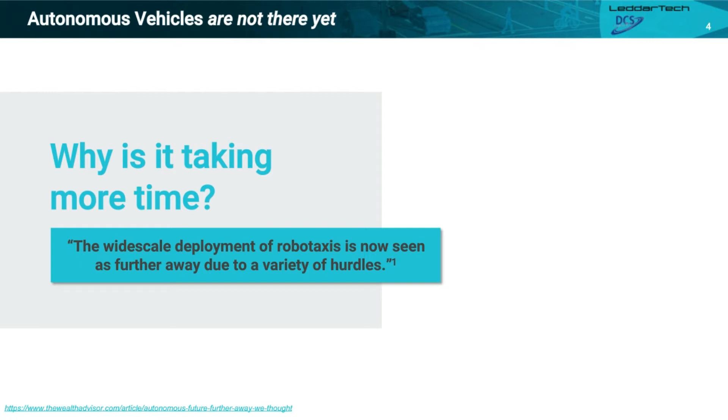So why is it taking more time? There are many reasons for that, a variety of hurdles. So first of all, just the development time that it's taking. It's a lot more complex than people thought at the beginning, I think. Also, the technology readiness, the components readiness, the cost also of the components. It's going down a bit with the years, but it's still really expensive to develop those types of technologies. It's a really complex system.

Also, I think the market adoption, people might not be completely ready to have these types of vehicles on the road. And finally, and I think it's the big one, it's the regulatory and legal aspect of it. It's taking a lot of time for laws and regulation to develop and to be able to enforce them. And this is also one of the reasons, I think, why completely autonomous vehicles at least are taking longer than we thought.

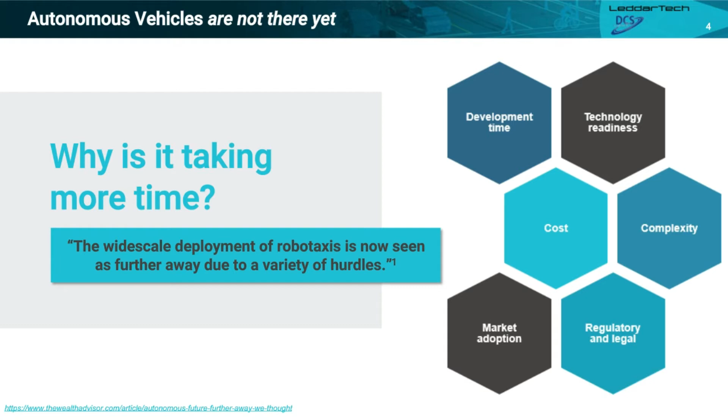There's many challenges and opportunities ahead of us, and I think if we focus on the short term, we need to focus on ADAS systems. So if autonomous vehicles are taking longer and are not there yet, we need to focus on what's coming in the next few years. And the ADAS system market is huge.

The market is evaluated to be $81 billion by 2025. This is including all different companies that are included in this: OEMs, tier ones, the components suppliers and stuff like that. So it's really a big market.

We need to focus on the short term and how can we improve those ADAS systems. So there's a lot to do in terms of efficiency, the convenience also of the system, and how can we make those systems more safe. Because I think this is the main goal also of ADAS and autonomous vehicles, is to make the roads safer.

This leads me to talk about the weaknesses that we have in today's ADAS systems. So if it's such a big market, and it will still be a big market in the next 5-10 years, I think there's some weaknesses that we need to look at and that we can maybe improve. So the technologies that we are using at the moment have some drawbacks, of course. This will always be the case.

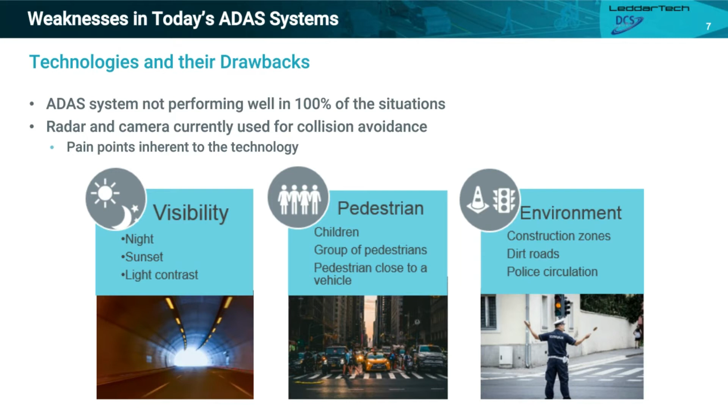Here, I think this is an interesting statistic. It's saying that 75% of pedestrian fatalities occur in the dark as compared to daylight, dusk, and dawn. So when I'm saying that cameras or sensing technologies have some difficulties working at night, this becomes a big issue considering that almost all of the fatalities with pedestrian collisions happen during the dark.

So this is, I think, a big point that makes it clear that we need to improve the ADAS system at the moment and make sure that it can work properly in the dark, because just this, I think, is a really important point, and it would be a great way to improve safety on the road.

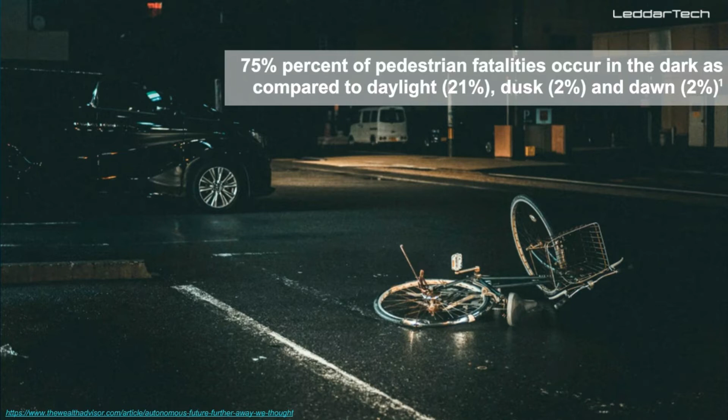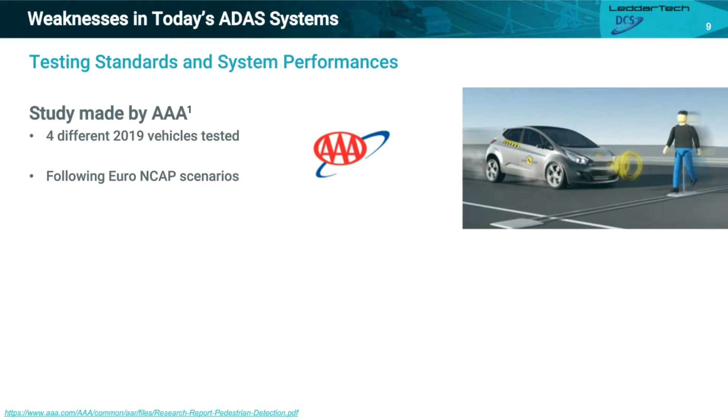Here is a study that was made by the AAA, the American Automobile Association. They used 4 different 2019 vehicles. They tested these vehicles with different scenarios, always following the Euro NCAP scenarios. And the result that they got, honestly, I thought the ADAS systems in 2019 vehicles were better than that.

So here, the result that they got is at 20 miles per hour, a collision with an adult pedestrian was avoided 40% of the time. I think that this is a result that might be okay for helping in collision avoidance and stuff like that, but it's still not a perfect score.

And then when you use a child pedestrian target, this number of collision avoidance was reduced to 11%. So it means that basically when you have a child crossing the street, almost all of the newest systems on the vehicles will not be able to detect it.

Now when you move the speed a bit higher, now we're at 30 miles per hour, which is still not that high because it's only like 50 kilometers per hour. 3 out of 4 vehicles tested failed to reduce the impact speed by at least 5 miles per hour. So basically almost all of the models that were tested hit the pedestrian at full speed.

And finally, the evaluated pedestrian detection systems were completely ineffective during nighttime conditions. So this is another thing that I was saying earlier. Cameras have some issues during the night, and it's clearly shown here in the study that was made.

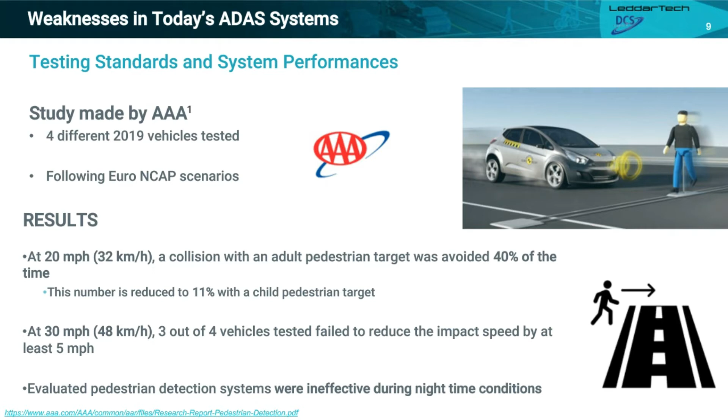So now I talked about the weaknesses that we have in ADAS systems at the moment, but what can be improved? I'm thinking mainly about 3 different points. The first one is technology, of course. We need to improve the technology or use different technologies. The second one is the regulations and standards that can also be improved. And finally, the test scenarios, a bit like the ones I was referring to by Euro NCAP. So these are the 3 topics I think that we can improve.

Technology, I'm going to dive a bit deeper into later. So now for regulations and standards. Creating a regulation takes a lot of time. It's a really long process to be able to enforce and create a law. It takes about 10 years or even more, and this is specifically in the automotive world.

So I think that we need some improvement in terms of regulation and standards to make sure that it's more clear and that every company or every OEM is following the same type of rules, but it's taking more time. So of course, I think it will come and it's in the process, but we just need to be a bit more patient.

There are already some regulations that are coming in the ADAS world. The first one, I think, is a really interesting one. It's the European regulation for a mandatory blind spot information system on trucks. This is starting 2022. So basically, every new truck model will need to have a blind spot information system starting 2022 in Europe. This is really a big deal because it's one of the first laws or regulations that mandates new trucks to have this type of blind spot information system.

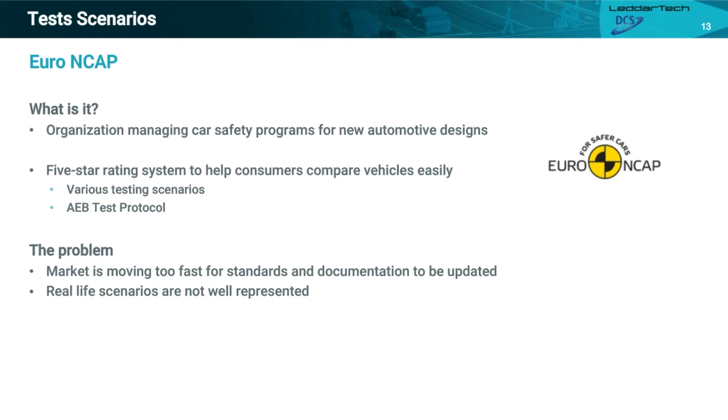And I think the problem is that maybe the market is moving just too fast. So it's hard to update standards and documentation every year. And I know Euro NCAP is trying to do it, but the market is moving really fast, and you cannot update standards or protocols every 6 months. So this is why maybe it's falling a bit behind. And also, I think that real-life scenarios might not be well represented in the Euro NCAP scenario. And I think these are the 3 main points why.

It's usually low-speed scenarios. So you saw earlier with the study that I showed, the tests were made at 20 miles per hour and 30 miles per hour. So these are not really high speed or real life speed where you could hit a pedestrian. Sometimes it's at a higher speed. Also, it's usually done in good visibility. So usually during the day, there are some Euro NCAP scenarios that will be done during the night, but then you make sure that every 10 meters or something, you have a lamp pole and a really good visibility, even if it's during the night. And also, usually it's simple scenarios, so a vehicle that's coming straight and then a pedestrian crossing right in front of it. So it doesn't consider what happens in real life, and sometimes it's a lot more complex than that.

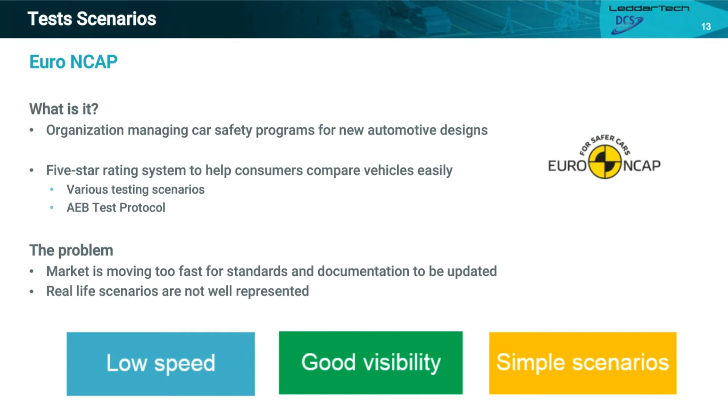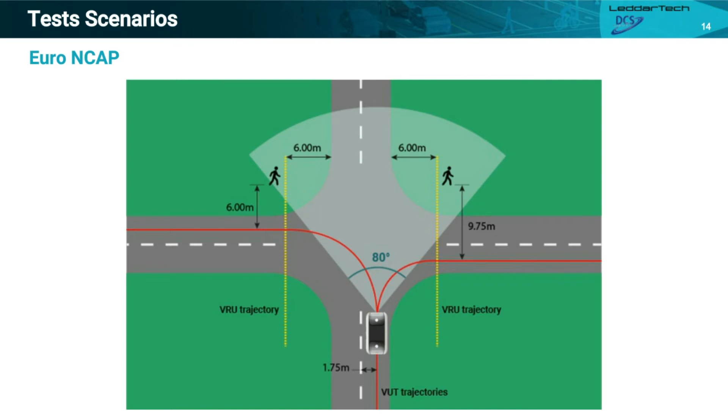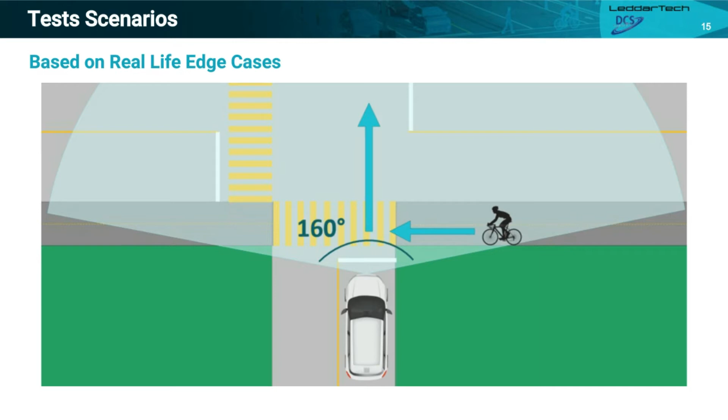And now, just previously I was talking about the technology that needs to improve. So I talked a lot about radar and camera. These technologies are at the moment in vehicles, but there's also new technologies that are coming, and you probably see where I'm getting into here. So LiDAR, of course, they're evolving a lot. It's technology that's entering really the automotive market.

It's been here for a number of years now on test vehicles and different type of vehicles that did some tests, maybe for 10 years now, but in the last few years, there was a lot of optimization in terms of size, cost, and performances. So now the LiDAR technology is more ready than ever to be implemented into the automotive market.

And when we think about LiDAR, it should not be seen as a competitor of this technology. I think it's really a complementary offer to the market. So it's really a new approach of sensing, new technology. It's different from a camera or a radar, and I think it can really complement these two technologies well to make sure that you have higher performances on your ADAS system and that you have higher level of safety for pedestrian and vehicle detection.

And LiDARs can be really used in different mobility markets. So we usually see LiDARs in autonomous shuttles. We also see it in passenger cars and robotaxi. But it can also be used in trucks, commercial vehicles. Also, industrial vehicles could be really useful for LiDAR. So I think there's lots of mobility markets where LiDAR has value, and not only in fully autonomous vehicles, but also in ADAS systems.

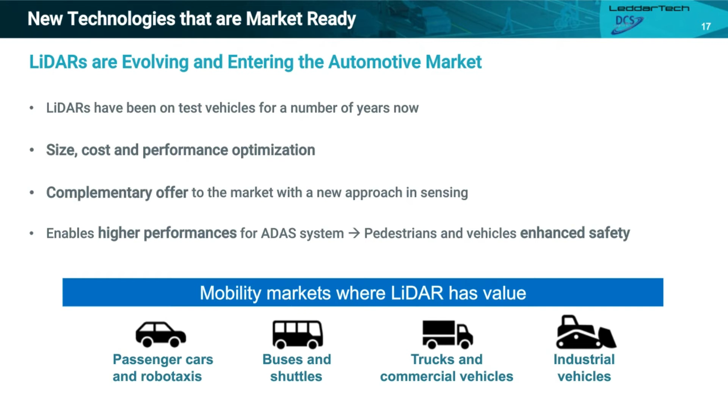And finally, it has night visibility. I think this is a major important aspect of LiDAR: if you're during the night, camera will not work so good, and radar will have some difficulty, for example, detecting a pedestrian, but then LiDAR will be here to complement these pain points from radar and camera. So this is really what I wanted to explain, that they can really complement each other to make sure that you have a safer system and that your ADAS system is having better performances than what we have at the moment.

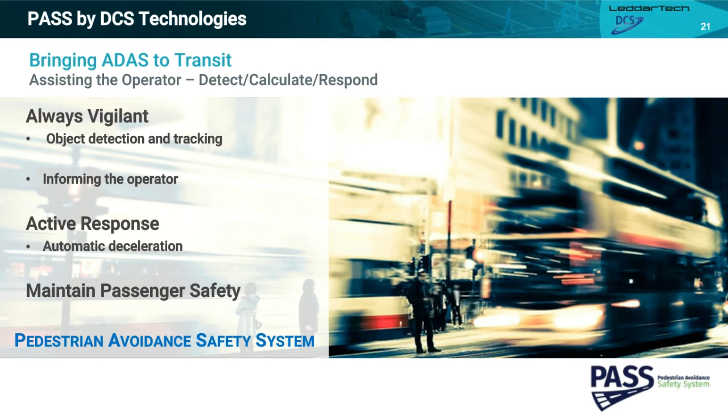Today I'll be stepping through the following topics. ADAS for transit bus is similar to passenger car but different. Choosing the best sensor technology for PASS. A detailed overview of how the DCS PASS technology assists the transit bus operator, and how DCS is utilizing PASS in a transit bus application to enable ADAS test and safety standard development for the transit industry.

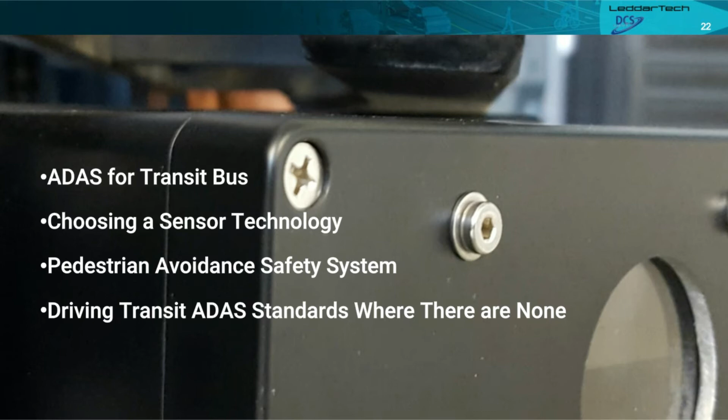ADAS for transit bus, pedestrian avoidance and passenger safety. Transit bus versus passenger cars, similar safety goals, but we have very different operating environments. Whether we are talking about passenger car or transit applications, we safety design engineers all have the same goal: minimize harm to the vulnerable road users and passengers alike.

I'm sure that many of you in the audience have seen or own a personal vehicle with an array of safety features, which pedestrian detection and automatic braking may be one of them. At DCS, we recognize that the same safety technology should be available to the transit industry, particularly urban transit buses where bus to vulnerable road user interaction is very high. So let's face it, buses attract pedestrians.

The U.S. Federal Transit Administration reported that in 2017, the transit bus industry suffered over 4,000 collisions, resulting in more than 16,000 injuries and nearly 100 fatalities. That's the driving force that motivated our engineers at DCS to bring vulnerable road user collision avoidance technology to the transit bus industry with PASS.

Transit bus and passenger cars' primary safety goal is the same: to mitigate collisions with vulnerable road users. However, the operating environments of the two are very different. Passenger car safety systems are designed assuming restrained passengers, allowing for full force emergency braking at the last possible instant. Passenger car collision avoidance systems are certainly marketed and sold demonstrating that fact.

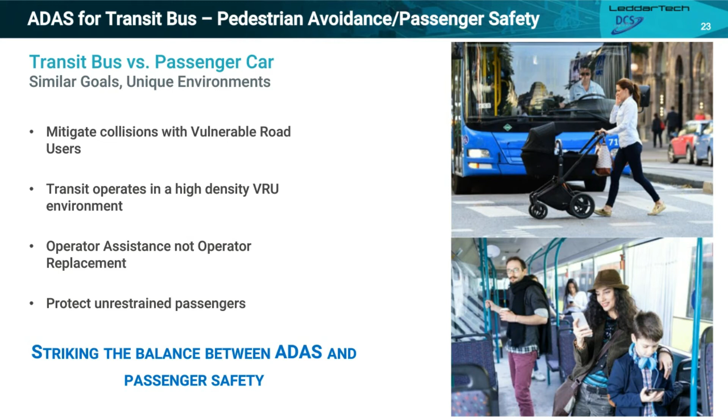Choosing the proper sensor technology for the application. DCS engineers evaluated many object detection sensor technologies as the basis for our detection during the design of PASS. Robust object detection and tracking algorithms require highly accurate distance measurements. In addition to accuracy, the sensor technology needed the measurement range to cover the transit bus operating speeds and scenarios. LeddarTech LiDAR products delivered on both accounts.

We needed the flexibility of the sensing technology to address operational specific vulnerabilities such as A-pillar blind spots and areas directly in front of the bus that may be obscured from the operator's view. Think bike racks, bikes in a bike rack in the front of a transit bus. We were able to tailor both the horizontal and vertical fields of view from the available LeddarTech LiDAR configurations.

We needed high reliability to survive and perform in the environment of a transit bus where weather extremes and high vibrations are the norm. We needed a small feature size to provide flexible mounting options. When mounting PASS in a retrofit situation, ideal mounting locations may have already been claimed by existing equipment. With no moving parts and small feature size, the LeddarTech M16 solid-state LiDAR brings an inherent level of robustness to operate when needed in challenging environments while remaining small enough to keep our space claim in check.

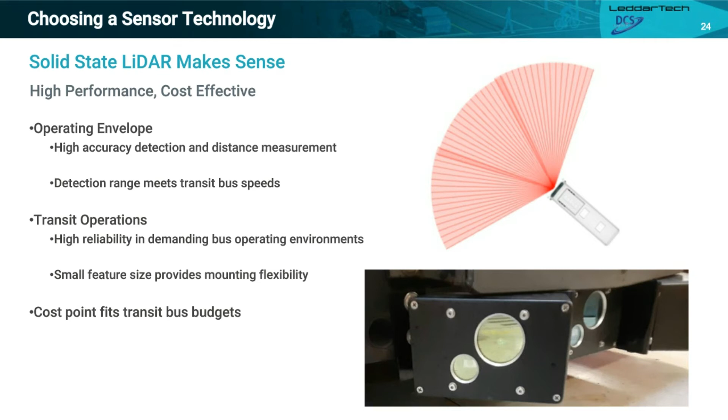I'd like to talk a bit more in detail about how PASS works and how it assists the operator by providing automated warnings and active vehicle deceleration to hazard situations. PASS is an SAE Level 1 ADAS safety system providing operator assistance. And then the challenging environments for the operator. The typical transit bus operator must deal with an array of factors competing for their attention in urban driving conditions.

To help drivers avoid or reduce the severity of collisions with vulnerable road users, PASS informs the operator and automatically decelerates the vehicle when an imminent pedestrian collision is detected. The PASS-controlled deceleration rates are specifically designed to gently slow the bus, allowing time for the operator to use the primary braking system to bring the bus to a controlled stop. Again, striking a balance between external VRU collision mitigation and internal passenger safety.

So the response time is certainly critical. Many studies have shown that the time an operator takes to react to a stimulus, much like a collision warning indicator, and initiate a brake apply is about 1 second on average. Longer if the operator is distracted or fatigued.

During that second, a bus moving 15 miles an hour will travel 22 feet. At 25 miles per hour, the bus will travel about 37 feet. During that time, there's effectively nothing being done to mitigate a collision. Once the operator does become engaged, the result will most likely be a panic braking situation.

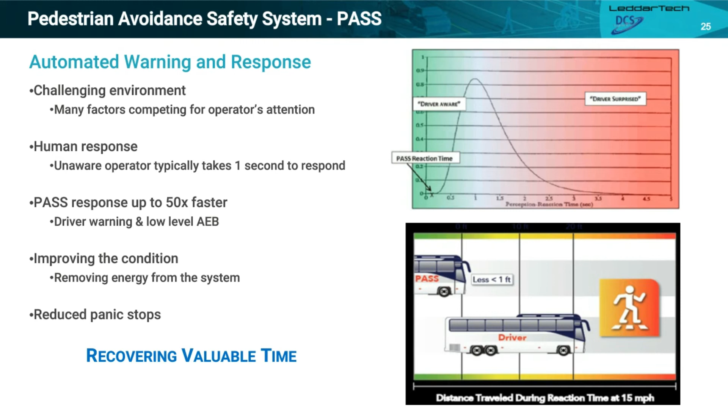As Dominique pointed out in her presentation, there are gaps to be filled in ADAS standards. Currently, the standards that do exist are overwhelmingly intended for passenger cars. ADAS standards for transit buses, especially in North America, are nearly non-existent. DCS has been fortunate enough to be part of a team sponsored by the U.S. Federal Transit Administration and Pierce Transit of Lakewood, Washington, to evaluate advanced collision avoidance with automatic emergency braking technology integrated into urban transit buses. One of the main goals of the project is to collect system performance and operational data to lay the groundwork for ADAS test and safety standards for transit buses.

To generate the needed data, system performance testing was approached in a scientific and controlled manner. Our team first created test scenarios baselined by adapting and augmenting existing Euro NCAP automatic emergency braking and SAE J3029 test protocols to align with transit bus operating conditions and environments. Test protocol modifications included lowering the test speeds of the vehicle and test targets appropriate to typical transit bus operational speeds. New test scenarios were created to include turns with a vulnerable road user occluded by the A-pillar, simulated bus stop entry and exit, low light night conditions, and adverse weather conditions, rain and fog. In all, over 150 different test scenarios were executed on a closed area test facility.

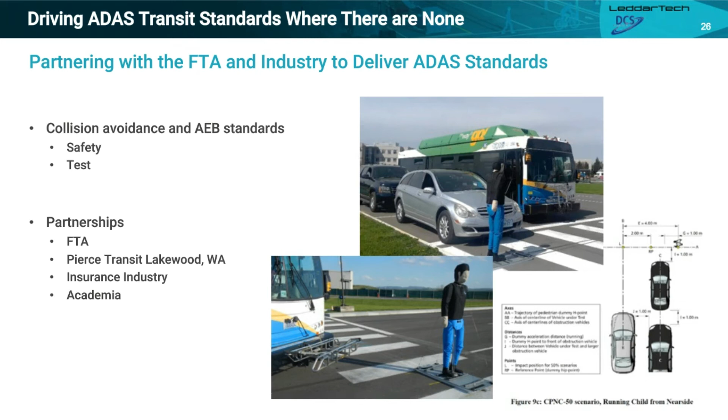Thank you, Dan. It was a very interesting presentation, and I think it's a good application, and it really shows where we can use LiDAR and ADAS systems.

So now I want to do a really brief overview of the Leddar Pixell Cocoon LiDAR for ADAS. This is a new LiDAR product developed by LeddarTech, and this is not supposed to be kind of a market push. I just really want to explain some use cases that we've thought about on our end. So this is what my team and we do, just thinking about real life scenarios and trying to develop a product that will have a real fit in the market. So this means trying to really understand the scenarios, the system requirements, and then this leads to final LiDAR requirements. So we're able to develop a LiDAR that we think will have a real fit in the world. So I'm going to try and explain a bit that.

So first of all, the Leddar Pixell, so what is it? It's a 3D flash LiDAR. It's 100% solid state. That's what we do here at LeddarTech. It has zero dead zone proximity coverage in all the illuminated field of view. So basically, this is the concept itself of a flash LiDAR. It's road-ready design. It also has superior durability. So we have a field of view of 180 degrees, so we're able to detect objects and VRUs on all this horizontal field of view.

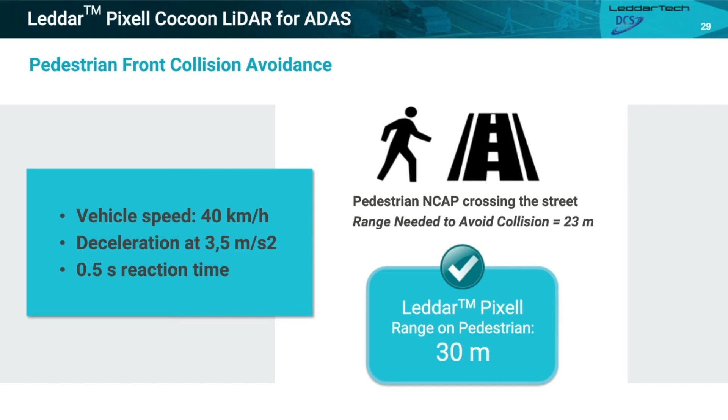So we try to analyze these scenarios, and then afterwards we develop the product. So we analyze different scenarios, and then we say, okay, we need these types of performances to make sure that the LiDAR that we push to the market will make sense and will really answer a certain need. So this just shows that we can comply with this first scenario.

Here we have another one that's kind of the same thing, but here we have different targets, and we also have a higher speed. So now we are at 60 kilometers per hour of speed, and then we have a reaction time of 0.5 seconds again, but then the deceleration is a bit more aggressive. So we are at 7 meters per second squared. This would really be kind of an automated emergency braking, considering that you are in a vehicle and you have your seatbelt on, of course.

So we have two scenarios, a cyclist that is crossing the road at 20 kilometers per hour, and then a running pedestrian at 8 kilometers per hour. And the range that you need to avoid the collision with both of these road users is respectively 33 meters and 28 meters. This is all done on calculation of the speed of the object and the speed of the vehicle. So then again, on the Pixell, we have a range on the cyclist of 50 meters and on the pedestrian of 30 meters.

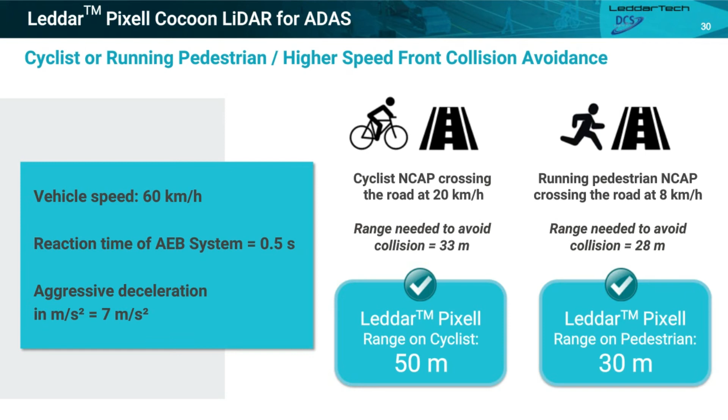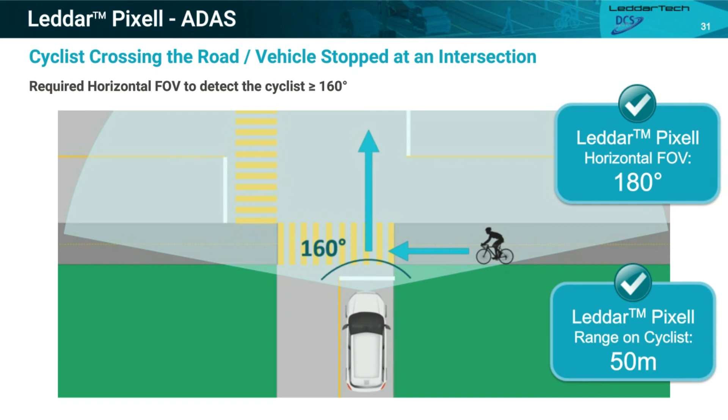Now this is the image I just showed earlier, and I thought this is kind of a real life edge case scenario. So you have a cyclist that's coming at a certain speed directly on your right, and you are stopped at an intersection. So here you would need more than 160 degrees to make sure that you can really detect the cyclist that's coming really close to you. So with the Pixell, we have, as I said earlier, 180 degrees of horizontal field of view. And then we have, again, the range on the cyclist of 50 meters. So this use case would be complied with.

And the last one here is a cyclist that would be along the road and a truck directly on its left, going right in front of the cyclist and then making a right turn just in front of the cyclist. This is a really important use case. It's one of the use cases where there are the most cyclist fatalities in the world. Trucks have huge blind spots, and this is exactly the reason why they developed this new regulation that I talked about earlier. The United Nations Economic Commission for Europe came up with this new regulation for blind spot information systems, and this is the main use case behind it, to be able to avoid a collision with a cyclist. So here I really used their numbers.

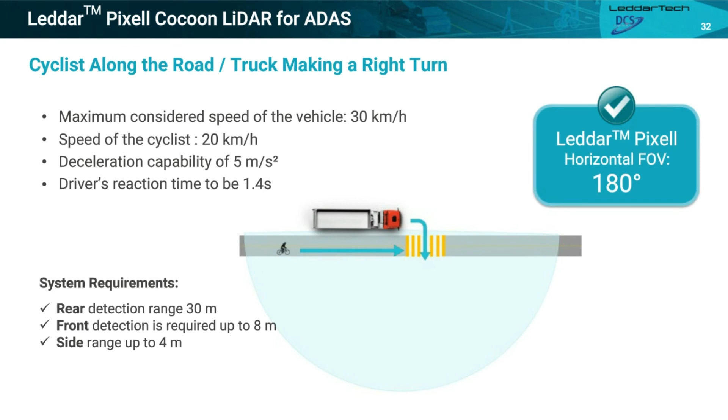We have a vehicle speed of 30 kilometers per hour, and the cyclist is at 20 kilometers per hour, right behind it. And then the deceleration capability of the truck is considered at 5 meters per second squared, and the driver's reaction time here is a bit longer. It's 1.4 seconds. The reason behind it is that this is an information system, so the truck will not brake by itself. The ADAS system will give a warning to the driver, so the driver needs a bit more time to look at the surrounding environment and then make a decision. So if we analyze those specifications of the scenario, we will need certain system requirements. So the detection range on the rear would be 30 meters.

On the front, it would be 8 meters, and on the side, up to 4 meters. So this gives us kind of a 180-degree detection zone with a certain range that we need to respect to make sure that we comply with this scenario. And again, we have 180 degrees on the Pixell and 50 meters on the cyclist.

So this pretty much concludes what I wanted to explain, just trying to think about real life scenarios, what's going on in the real world, and making sure that we are developing the best product that we can to enhance safety on the road. So I'm pretty much done on my part, and I think we can move to the Q&A now.

Okay, well, thank you, Dominique and Dan, for providing that great overview. So let's now go ahead and dive deeper and begin our Q&A session. The first question looks like this one's for Dan. The question is, since PASS is a safety system, do you have the capability to provide system telematics information to the end user? Yes, thanks, Nick. Yes, we do. PASS currently logs system performance and vehicle dynamic data during key events such as collision warnings and automatic emergency braking activations. We'll take those data logs that are transmitted back to our DCS servers from each vehicle for further analysis and distribution to our customers as needed.